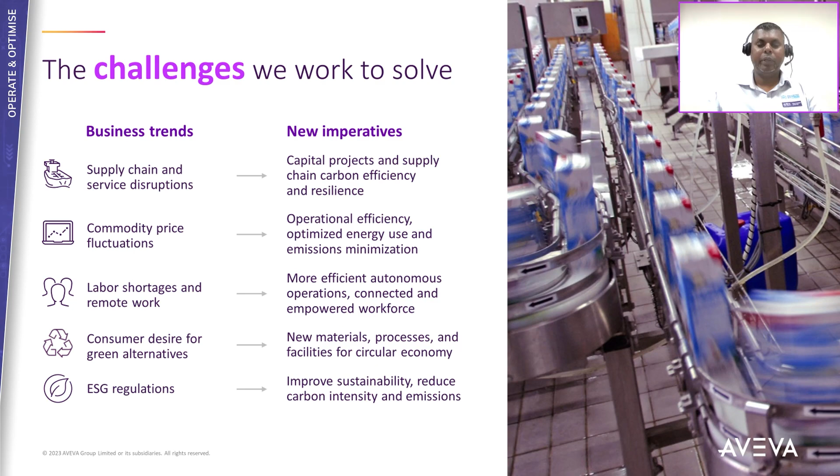Some of the imperatives to counter these are capital projects and supply chain carbon efficiency and resilience, operational efficiency, optimized energy use and emissions minimization, more efficient autonomous operations, connected and empowered workforce, new materials, processes, and facilities for circular economy. And we look at improving sustainability, reducing carbon intensity and emissions.

On this slide, we look at digital transformation, which is a business imperative. We'll touch on the challenges and the initiatives to counter these. Improving agility and consistency in manufacturing: we need to transform the way you execute work across a team and enable natural collaboration between roles. Safeguarding product quality, safety, and compliance: we need to implement safety regulation compliance, end-to-end traceability, and new product introductions.

In terms of minimizing waste and losses, we need to measure and improve operations performance and continuously improve efficiency and sustainability. In terms of improving productivity and efficiency, we need to be more demand-driven, resilient, increase value, and implement new business models.

On this slide, we touch on AVEVA's digital thread for the manufacturing value chain, on how to integrate planning, execution, and optimization in manufacturing. AVEVA software solutions provide visibility and traceability, allowing you to view enterprise-level KPIs and scorecards aggregated from multiple plants, and selectively share operations data across the enterprise, supply chain, and to customers. Production and schedule optimization optimizes the supply chain sales and operations plans for cost, sustainability, and business agility. Manufacturing execution allows you to execute optimized schedules and manage all work processes.

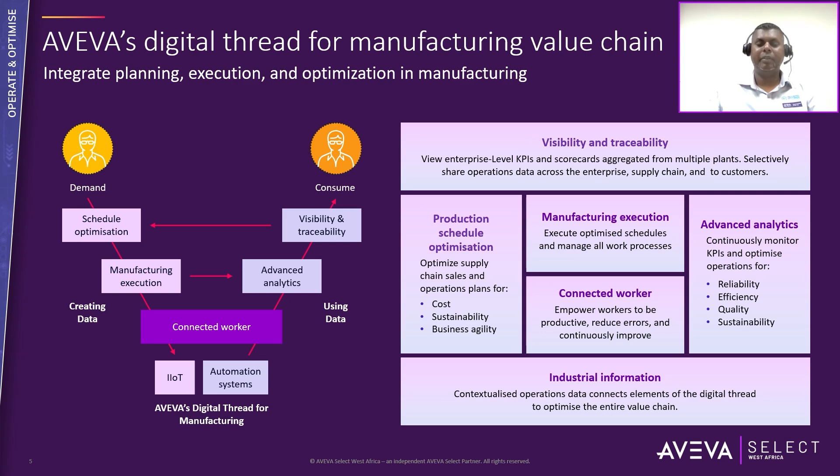Connected worker: we need to empower workers to be more productive, reduce errors, and continuously improve. Advanced analytics continuously monitor KPIs and optimize operations for reliability, efficiency, quality, and sustainability. And lastly, industrial information provides contextualized operations data and connects elements of the digital thread to optimize the entire value chain.

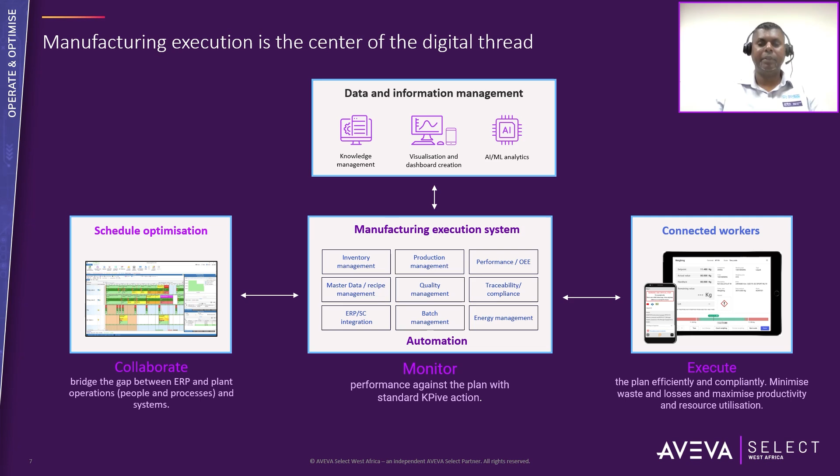This slide highlights that manufacturing execution sits at the center of the digital thread. As you can see from the graphic, we have collaborate, monitor, and execute, with manufacturing execution sitting right at the center, with data and information management at the top.

What is AVEVA Manufacturing Execution System? AVEVA Manufacturing Execution System offers a complete set of software functions to digitize, standardize, optimize, and govern operational processes and work activities across industrial manufacturing plants. Its integrated advanced planning and scheduling methods enable flexible scheduling and short-term production management. Businesses use it to safeguard quality and compliance and improve their operational efficiency so that they remain competitive.

Industry-leading agnostic connectivity to automation and industrial Internet of Things devices allows it to meet the real-time production control and regulatory compliance needs of automated production processes and equipment. Automatic electronic record keeping provides detailed product genealogy and end-to-end material traceability. AVEVA Manufacturing Execution System synchronizes human and machine actions dynamically with sophisticated digital workflow management capabilities, making it the first choice for fast-moving goods and repetitive manufacturing processes.

What is MES? According to MESA International, or Manufacturing Enterprise Solutions Association International, a Manufacturing Execution System delivers information that enables optimization of production activities from order launch to finished goods. In terms of the ISA model or framework, the MES layer focuses on a group of activities such as operations, inventory, quality, and maintenance activities, which correspond to level 3 in the functional hierarchy model.

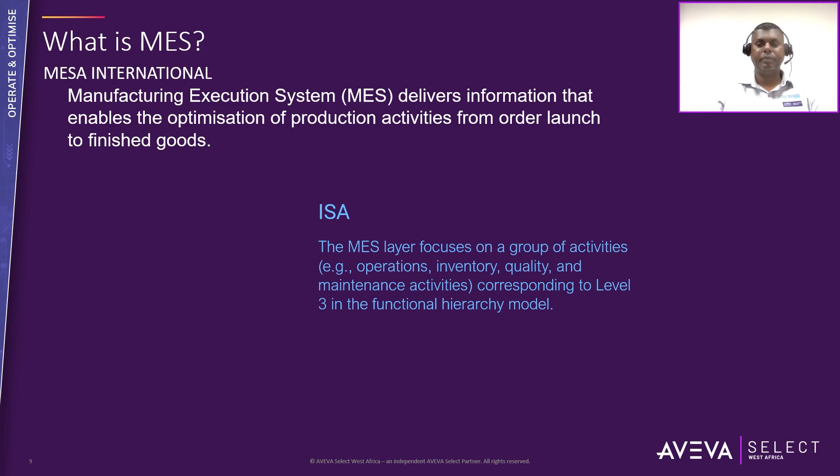On this slide, we take a look at what MES operations can enable you to achieve. So it can enable you to deliver planned versus actual production using electronic work order management, recording of production events, improve processes and production consistency using centralized manufacturing model, production rules and certifications, improve inventory velocity using real-time inventory management, bills of materials, definition of materials, substitutes and byproducts,

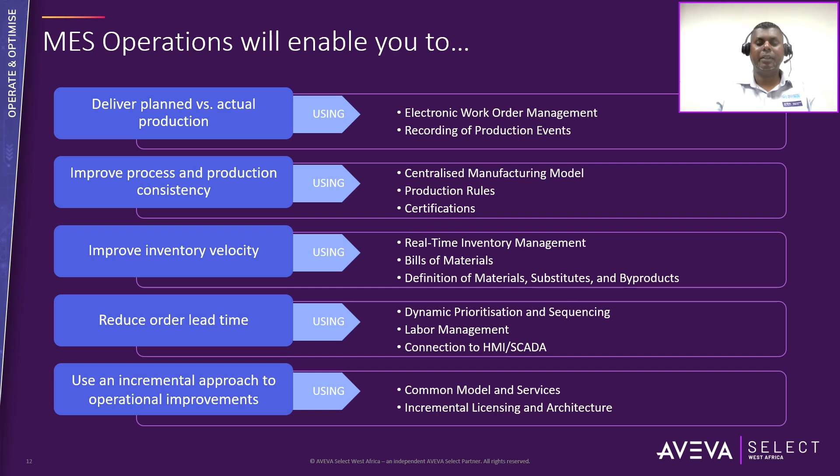reduce order lead time using dynamic prioritization and sequencing, labor management, and connection to HMI and SCADA, use an incremental approach to operational improvements using common model and services, incremental licensing, and architecture.

The middleware. Middleware is a group of core services for the MES product that processes data from various parts of the MES product as requests for information or actions based on shop floor activities. The middleware component also includes the service monitor. This is used to manage the middleware host and the MES service. Additionally, the MES middleware server can be accessed remotely by configuring the MES middleware proxy on the remote nodes.

Lastly, MES service. This handles the middleware activities that occur on a schedule, such as changing shifts, cleaning up stale sessions, and so on. It also includes a service monitor utility.

Now we look at the MES client components. MES Supervisor is used to coordinate and oversee the daily activities of the system. You can use it to create work orders, inventory levels, and storage location data. You can also use it to set up data collection, link MES to other databases and software, or you can store custom information and process sales orders.

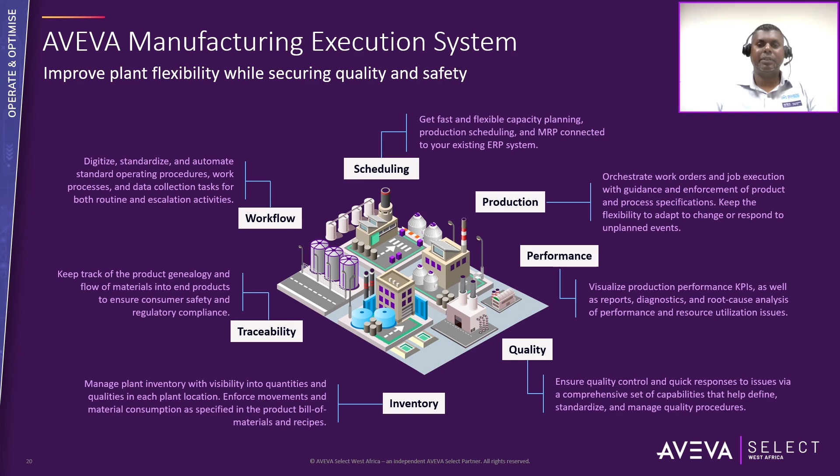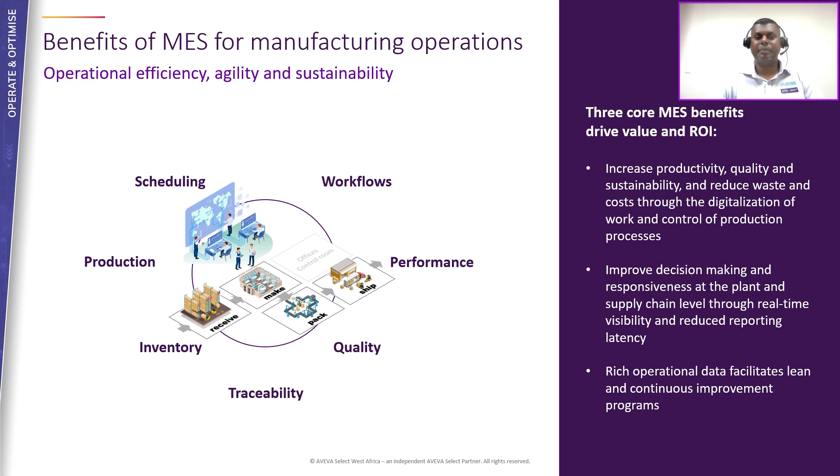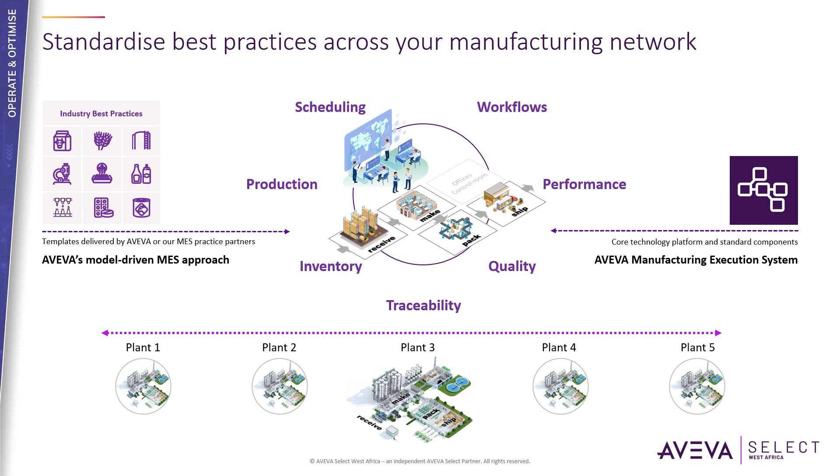On this slide, we look at how you can standardize best practices across your manufacturing network by using templates delivered by AVEVA or our MES practice partners, using AVEVA's model-driven MES approach, using core technology, platform, and standard components included with AVEVA Manufacturing Execution System. AVEVA's manufacturing execution software can enable you to create a digital thread across your multi-site operations, empowering your connected worker.

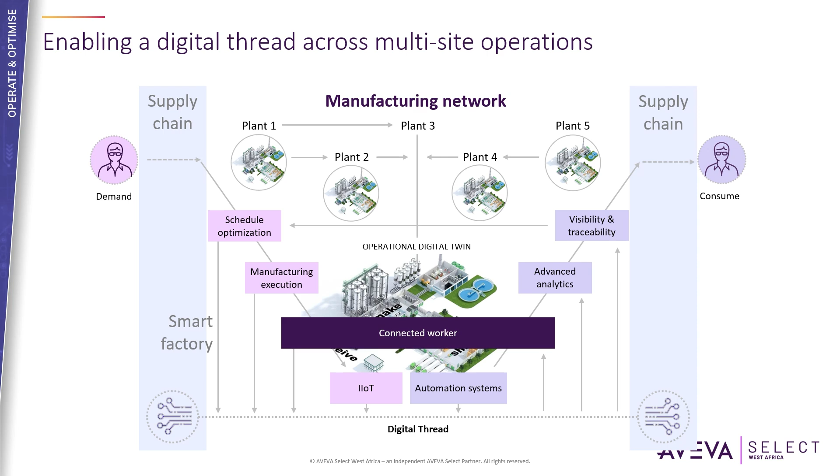AVEVA's MES and Connect visualization services allow you to visualize MES data using self-service and predefined dashboards. You can visually relate distributed plants data in context to each other, relate and gather insights across different data types quickly and easily, share actionable information with plant and supply chain operations and other teams anywhere through a browser.

Workflow management. AVEVA MES eliminates paperwork and mitigates human error. It manages collaboration and human processes with advanced digital workflow capabilities. Graphical workflow modeling describes what sequences of activity workers need to perform to execute simple or complex work tasks, quality inspections, data collection, or sign-off procedures.

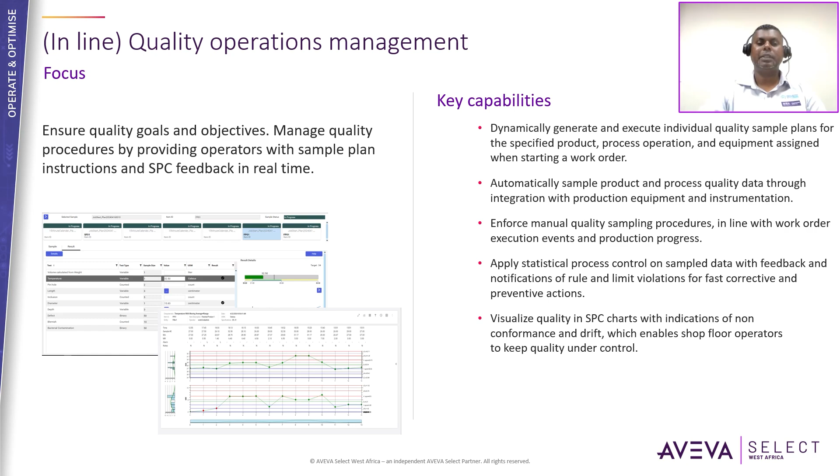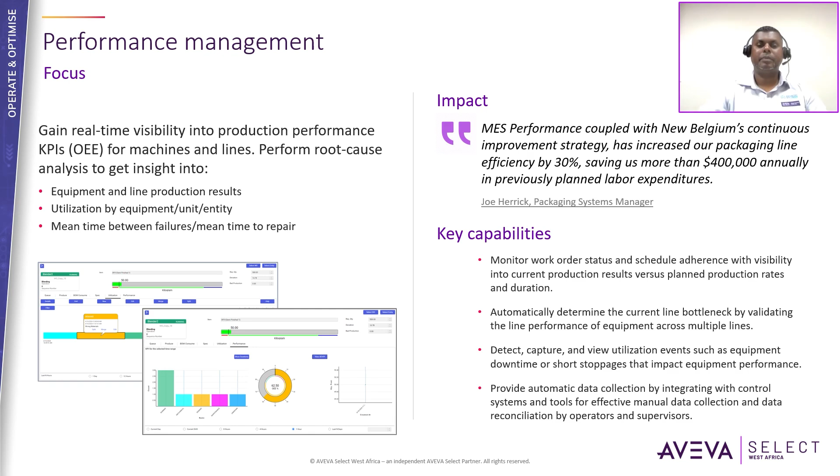In this slide, we look at the technology and systems layers. At the bottom, we've got our automation layer, which is where we get our field data from our data sources such as PLCs, equipment, and databases. This feeds into our system platform layer, which then connects to the MES, so AVEVA MES.

Okay, so at the top, we've got our enterprise layer where we've got our master data, inventory data, production data, and quality data. So this just highlights the different layers. We've got our AVEVA System Platform, and then we've got our AVEVA Enterprise Integration, or our enterprise layer.

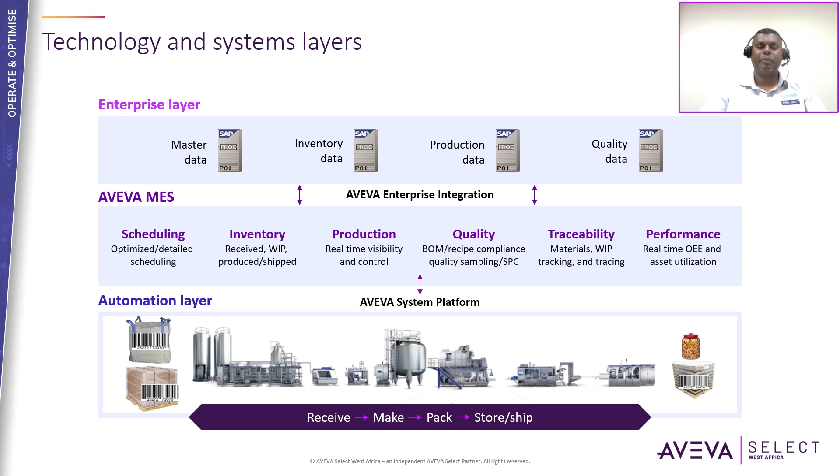On this slide, we look at what is operations modeling. Modeling is to mirror the real world as closely as possible, configure MES operations to support the data structure defined in the physical manufacturing process in order to capture data, obtaining accurate process and instrumentation. So P&ID diagrams, these are helpful for modeling.

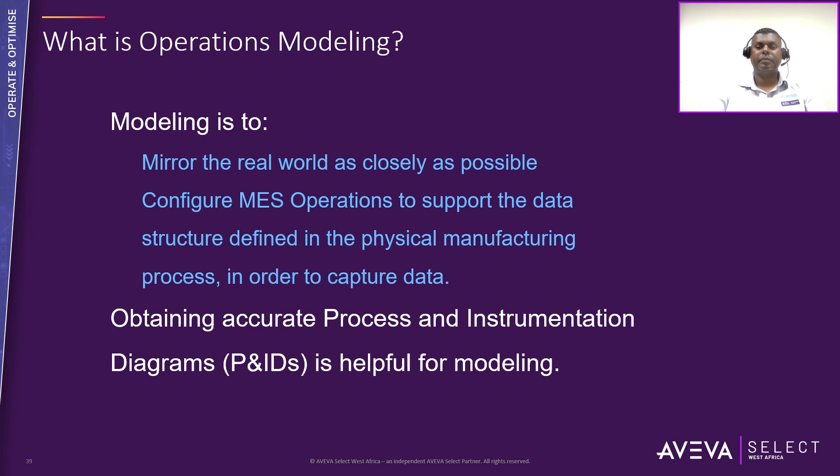Concepts and terminology. Entity. An entity is a physical asset for which information will be tracked or reported. An entity could be an entire plant, a production line, a piece of equipment, or even a module of a machine, also known as an area, equipment, or a machine. An item. Each of the materials consumed or produced by production processes. This is also known as material.

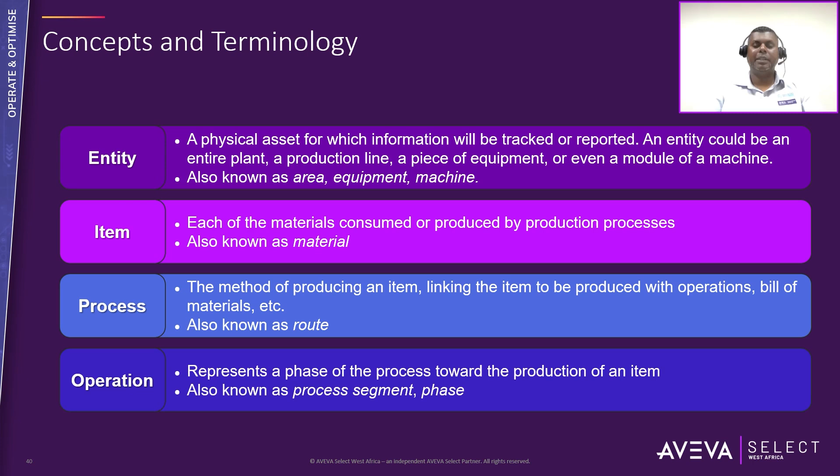Process. The method of producing an item, linking the item to be produced with operations, bill of materials, etc. This is also known as a route. Operation. This represents a phase of the process towards the production of an item, also known as process segment or phase.

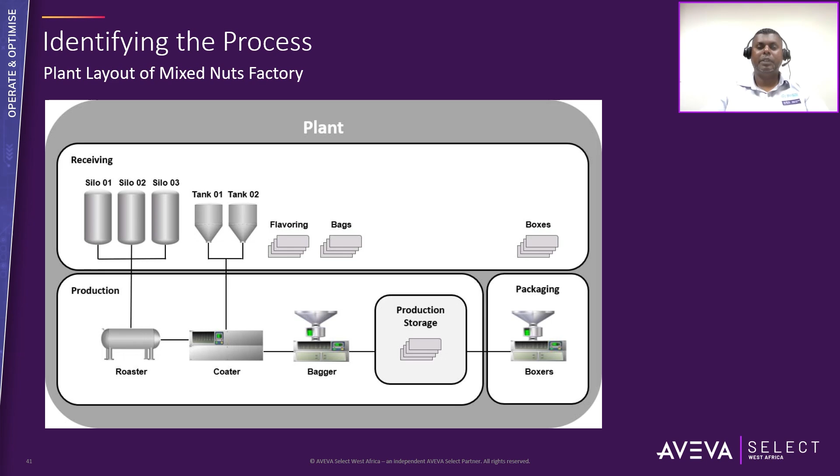So one of the key items when building an entity model or plant model is we need to identify the process. This can be assisted by referring to P&ID diagrams. For this example, we will be working with the plant layout of the mixed nuts factory. The AVEVA MES Entity Model Builder.

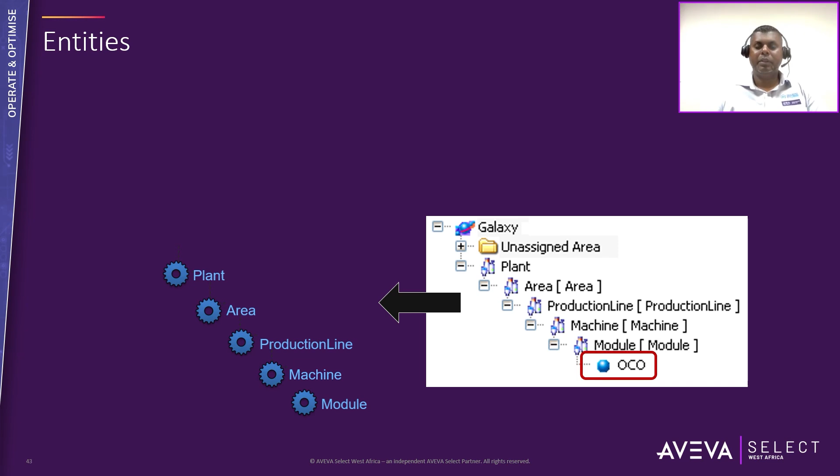On this slide, we can see we've got an area, a production line, a machine, and a module. This can be replicated in our System Platform model view. So here we can see the hierarchy, and on the right-hand side, this is the representation of our model view within our System Platform IDE. We've got our plant, our area that resides under the plant, production line, machine, module, and our operations capability object.

In this demonstration video, we take a look at the operations capability object, also known as the OCO object. The operations capability object is an automation object that allows you to configure entities to perform tasks such as starting, stopping, and running jobs, recording the amount of material that is produced, storing or transferring inventory items, and loading, uploading, and downloading job specifications.

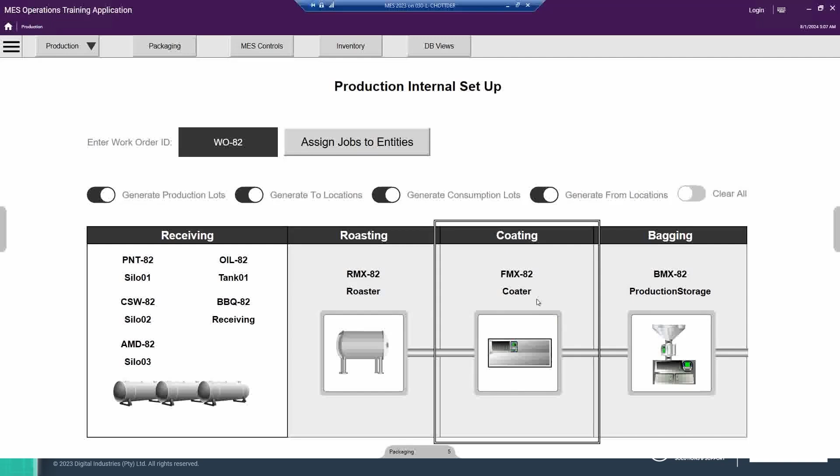So I've now simulated that we've had good production, and I'm going to end the job. If we go back to the MES client, we can see that this job is now complete. Okay, it's the same for the coater as well. I can interact with the coater, so I can just go back to production. I can click on the coater, verify it's got the correct work order, and I can start the job.

Okay, if I go back to the MES client, in the work order queue, I can see that the coater is now running. Okay, the required quantity is 125 pounds of coating oil. What we're going to do is we're going to simulate some bad production. So I'm going to give it a quantity of 100. Okay, so we've only had good production of 100. And then we've had bad production of 25.

Okay, and I'm now going to end this job. I'm going to go back to the MES client. Okay, we can see that the coating job is complete. And then lastly, we can run the bagger. So I'm just going to click on production. I'm going to go to the production storage entity. And I'm going to start this job. Okay, we'll see the required quantity updating, which will be 500.

Okay, and what I'm going to do is I'm just going to simulate good production and add that. Okay, and I'm going to end the job. So we can go back to the MES client. We see the bagger was running and then it should update. And there we go. The job is complete.

So from the SCADA side, okay, let's have a look. So we've got work order 83 and the coater job is not run yet. So what we're going to do is from the SCADA, we're going to go to the coater and we're going to start this job. We should get the required quantities from the database. We'll be updating shortly.

Okay, so now let's go to the MES Operator. Okay, so if I do a refresh, you can now see we've got all the information that's been populated because the coater is running a job. And what we can do is we can click on the route. So we can see the route. So it comes from the roasting, goes to the coating and then bagging.

If we look at the work order queue, we can see that work order 83 is running at the bottom here. Okay, so you have got your MES controls at the bottom here. You can either stop this work order, you can pause it, or you can view the BOM details, you can view the job attributes, etc. Okay, you can also view your production.

Okay, you can look at your BOM, so your bill of materials. You can look at your genealogy. If you're running MES Performance, you can look at your OEE. Okay, and you can also look at your inventory.

Okay, so this is an example of the MES Operator. So we've also got some .NET controls that you can embed in your SCADA application. If you're running either InTouch or AVEVA OMI, you can embed these .NET controls so you can run the MES Operator from within the SCADA application.

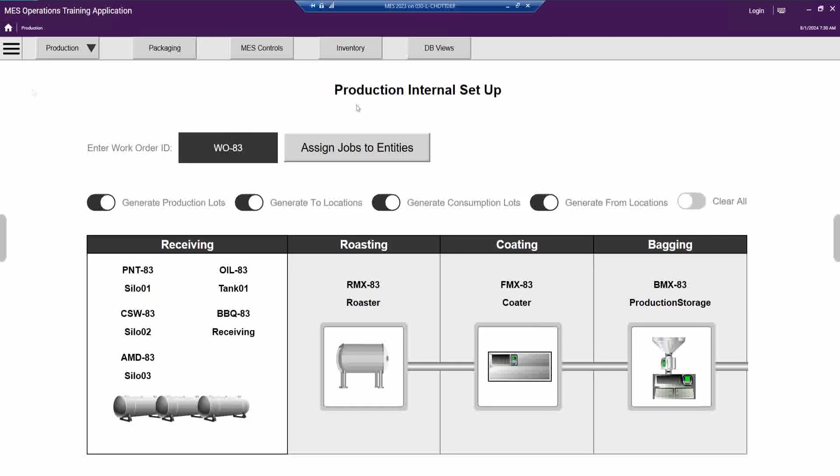Okay, next up, we take a look at tracking genealogy. So using our SCADA system, we're going to navigate to DB views. So DB views integrates with the MES database and provides a graphical representation of the data. So we can click on the genealogy data and we can see our various information. So we've got our operation ID, which is the entity, and then we've got the process that was run. So we've got roasted mixed nuts.

We've got our produce units. We've got the lot numbers. We've got the entity name. We've got the reason codes. Okay, we've got good work production. Item grades. We've got the item status, entity name, item class, and we've got some quantities as well.

Okay, so using the DB views on the SCADA, we can actually view the entities as well. So these are our various entities that we have defined. We can look at our work order queue. So if we scroll all the way to the bottom, we'll see the recent work orders that we've run. Okay, we can see the various information for these work orders. We can look at production data. Okay, we scroll all to the bottom. You can see our latest work orders that we created.

We can also look at consumption data. Okay, so we can look at the item description. We can look at the quantities. Okay, we can also look at step data, which we don't have anything at the moment. Specs data, we don't have anything. We can look at inventory lots. Okay, so we can look at our silo levels. Okay, we can look at our tank levels, our receiving, our production. Okay, we can also look at our inventory transfer information.